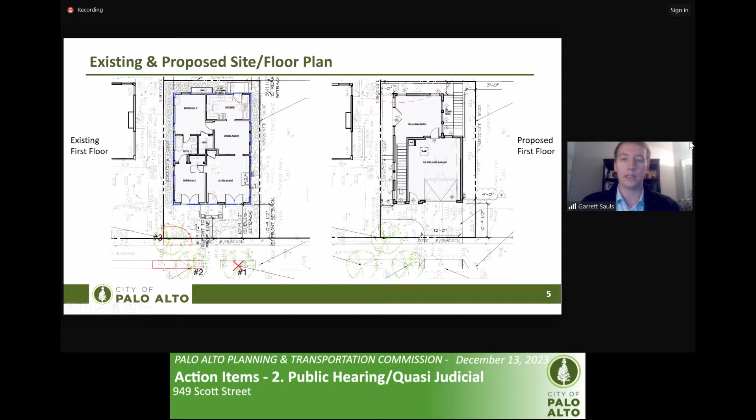Here you can see the proposed basement, where they have the family room and living room, as well as the bedroom and kitchen area for this proposal.

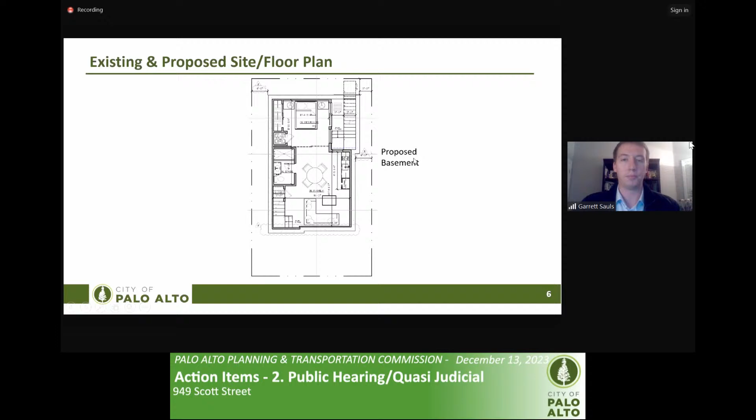On this screen, you can see the proposed elevations included in the plan set. This is the front elevation, with the doorway off of Scott Street and the driveway leading up to the 1-car garage. This is the side elevation from the left side of the property looking inward towards the site.

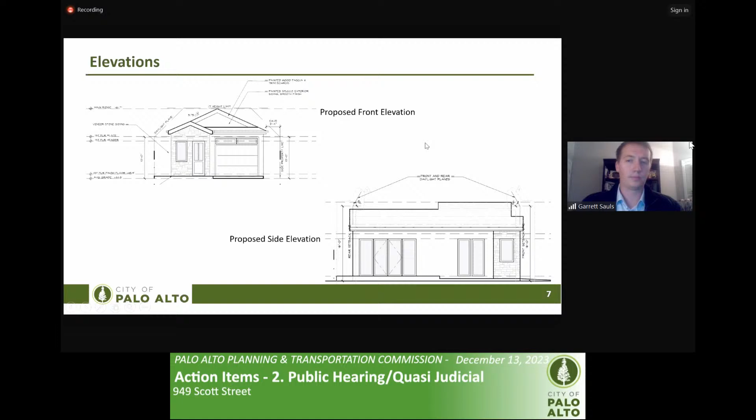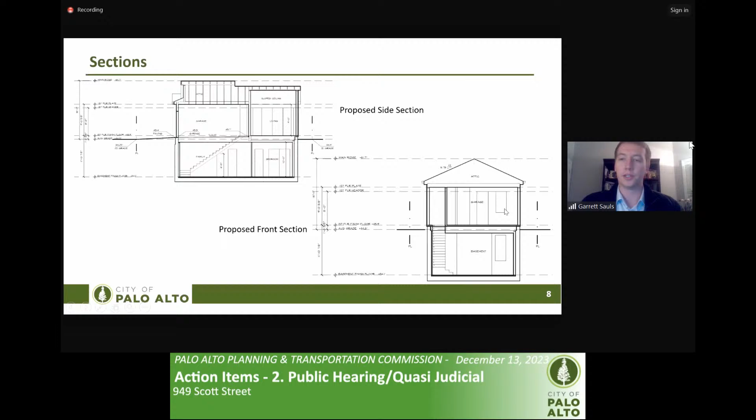Here are some section images showing cut-throughs through the building, showing the garage, living area space, and bedroom and family room space down below as a side section. And here you have a front section, which again shows those same areas.

We did receive a fair number of public comments on this application, relating to the number of variances requested, the aesthetic design of the proposed building, whether the structure will be used as a home or as an extension of the neighbor's house (who currently own this property), impacts to the existing street trees, concerns about parking within the area, the quality of life during construction, and lastly, consistency with the general plan as well as Senate Bill 330.

This last item loops back to item number 3, which asks the question of whether the existing structure is being replaced with something that still provides the capacity for a new single-family home for someone to live there.

Staff's recommendation would be to approve the proposed project based on the included findings and conditions of approval. That concludes my presentation. The applicant is also here and has a presentation that they will be able to share.

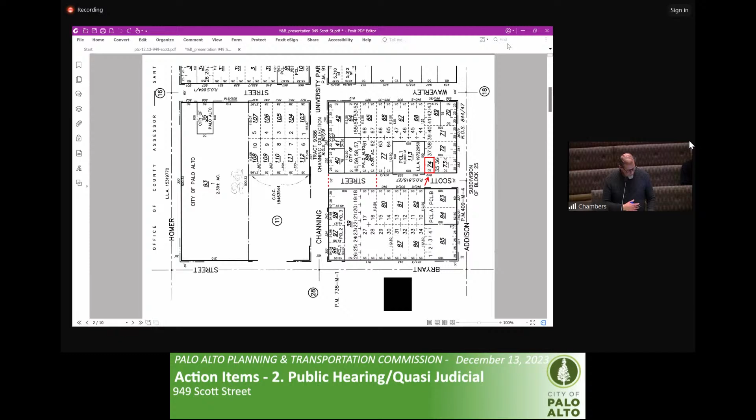So starting with the neighborhood, as we discussed, it's a little lot in the R2 area.

What a time to crash. I apologize, no, I just have to reopen. I'm pretty sure.

Looks like you're having a technical problem. I am, I'm sorry about that. If it's helpful, I can also share the applicant's presentation. That would work. Thank you, I think I can describe everything adequately.

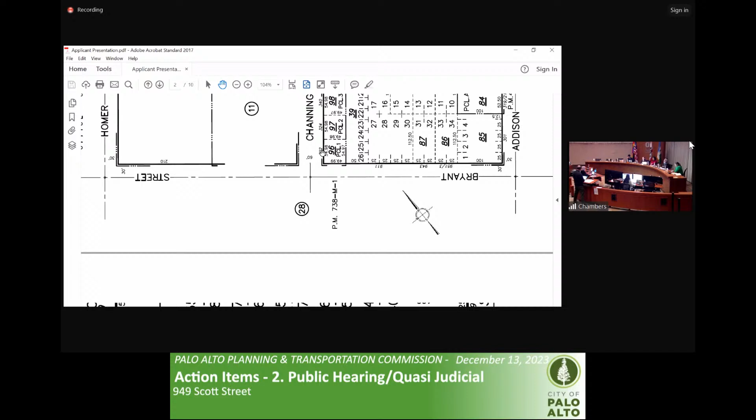That was just our chance to zoom in and understand the lot and the property. Skipping ahead to there we go. It's unique in its size and location.

If we go to the next one, we've seen this graphic before. So just to emphasize, it's only 180 square feet. That would be legally conforming, I should say. That's about a 0.12 floor area ratio if we were to stick just to that. That'd be similar to a comparable 6,000 square foot lot, 50 by 120, that you might see elsewhere all over Palo Alto. A 6,000 square foot lot with the 0.12 floor area ratio gives about a 720 square foot house, which leaves about 500 square feet for living area.

Certainly not what would be considered usable in a current context.

Next one. So just looking at the existing property, that's the existing house and floor plan. You can see we've checked the distances. The setbacks are currently 3 feet on the sides, as close as 2'10" on the right-hand side, and about 4 feet at the front and the rear. We're 17'10" to the residence on the right-hand side at 353 Addison, and almost 12 feet to the residence next door at 935 Scott Street.

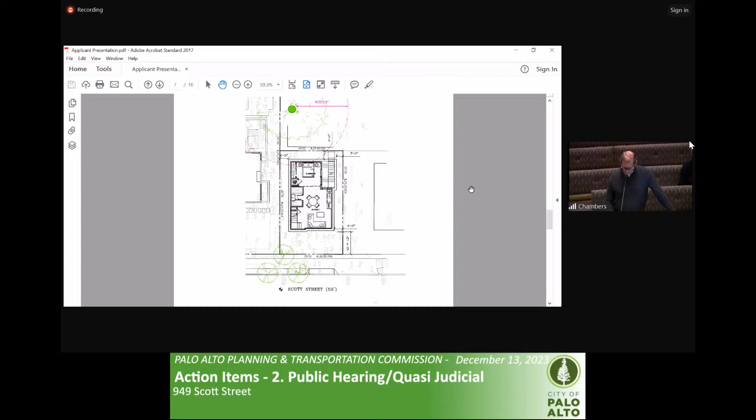There were concerns about the house being historic or old. It may be charming, but there was a historic investigation report by Page and Turnbull, and they found it to be ineligible for a historic registry. To clarify, Page and Turnbull is the city resource the city hires for these reports—this isn't a report we engaged privately to go in our favor. This is the city's firm.

Looking at our other slides, the previous slide was the existing front elevation—you can see the one street tree we'll be removing. The next slide is the proposed; we've ghosted the trees so we get a chance to see the architecture beyond for this presentation. You can see the driveway will be minimized into the right-hand side, closer to the other driveway. The last slide is our streetscape elevation showing the context of this structure compared to the neighbors. This won't be a view we'd ever actually see because of all the landscaping and trees, but it gives context of size and scale.

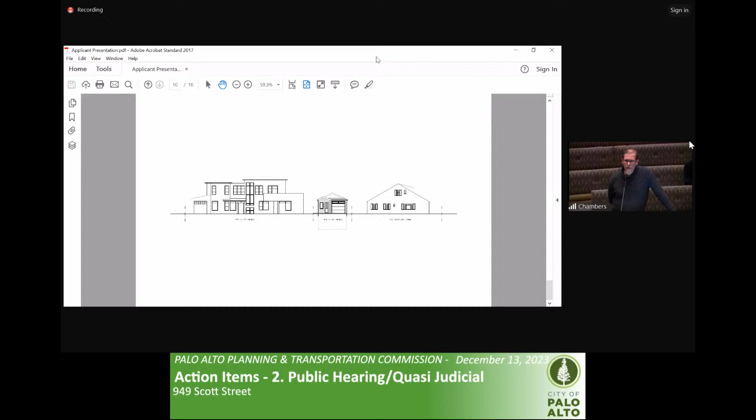I think that's the main points I wanted to drill on. We're ready for any questions or additional things we can provide.

Thank you. Thank you, Mr. Rhodes. I was wondering if my colleagues have any clarifying questions before we go to the public. Commissioner Hechtman?

Just a quick question for staff: the staff report didn't mention ARB. I take it this project didn't require any review by ARB? That's correct—this application, if submitted and approved, would simply go through a building permit process, given that it's a one-story home. Thank you.

Commissioner Chang: Quick clarifying question about the tree in the rear that is not on this property. If I look at A1.1, that drawing, there's a circle that shows a 300-foot radius. So what is required by the tree ordinance in terms of basements and trees?

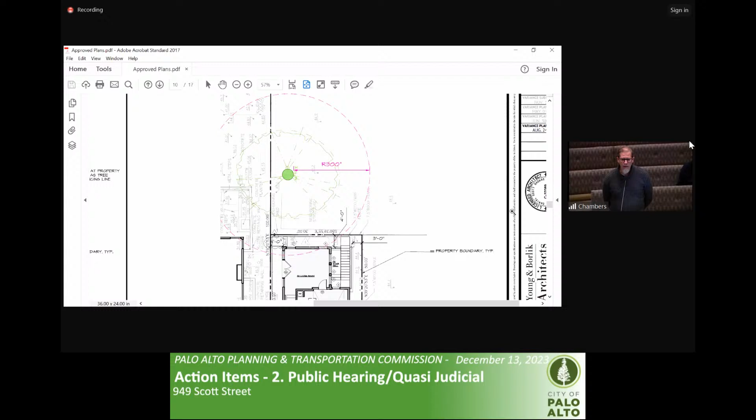Based on the diameter, it's 10 times the diameter for the tree protection radius. In this case, the arborist looked at that in terms of impact from the excavation. We would be using the back property line fence as essentially our tree protection fence in terms of any impact on the roots. The rear fence of the property line would essentially be our tree protection fence. Usually there's a tree protection fence that outlines that area to various degrees based on recommendations.

But I guess my question is, why is there a 300-foot radius and that circle goes into the basement?

Yeah, so the city has established standards for where tree protection measures should be put in place. Ideally what is intended is to try to provide as much buffer around where there might possibly be any potential roots. At this great a distance, there would not be structural roots to this great extent all the way out, extending towards the basement, where if they were to be modified, cut, or removed, they would somehow affect the tree to an extent that it would fail.

Okay, so the city arborist has made that evaluation then, correct? They do look at that as a part of the application submittal. This is, to some degree, a technical requirement, as Mr. Rose was talking about, where they look at the diameter of the trunk, and they've established a formula that says 10 times that diameter, you need to provide a tree protection fence around it.

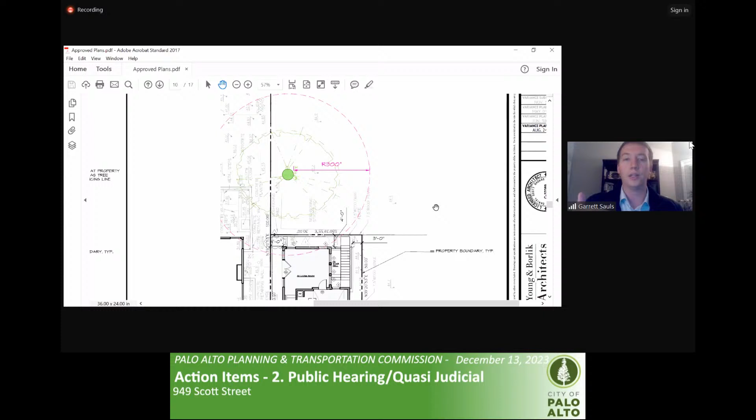If you see my cursor on the screen, if this tree were placed right here, such that the base of the roots, the more structural roots to the tree itself, were much closer, then there may be a scenario where any below grade construction would otherwise possibly cut into those structural roots. But at this greater extent back out here, these are almost like fingerlings or tendrils at that extent, as far away as it is from the main base of the tree, so you're not going to have structural roots that, if cut, would cause this tree to fail, collapse, or die.

Okay, thanks. And then I guess in the ordinance, is there some percentage of roots that can be removed? I think it's 25%, right? Is that the rule of thumb arborists have used in the past? I believe the new tree technical manual has tried to reduce that slightly, but 25% has been the general rule of thumb I've heard from urban forestry and arborists in conversations. This project wouldn't have anywhere near that kind of impact on this root zone.

The T sheets in our set also have the arborist report that we enlisted for the review, and they touch upon the impacts on the tree as well.

Okay. My other question is around SB 330. SB 330 only requires preservation of number of units, right? Reduction in number of bedrooms is not a concern, is that correct? I just want to verify.

In terms of the number of bedrooms, I will defer to Mr. Yang, but in general my understanding is that the number of units is the threshold that changes. So whether it's designed as a pyramid house or as a more standard type of single family development, so long as there are residential units being provided, in this case a 1-to-1 ratio, then there is not necessarily a loss of housing. Yeah, I don't have anything to add to that.

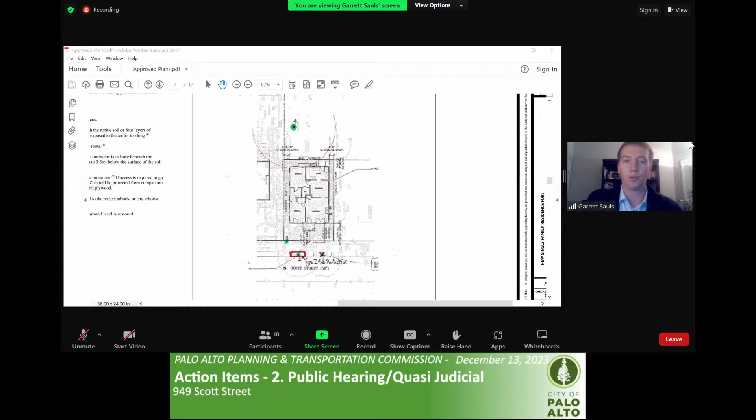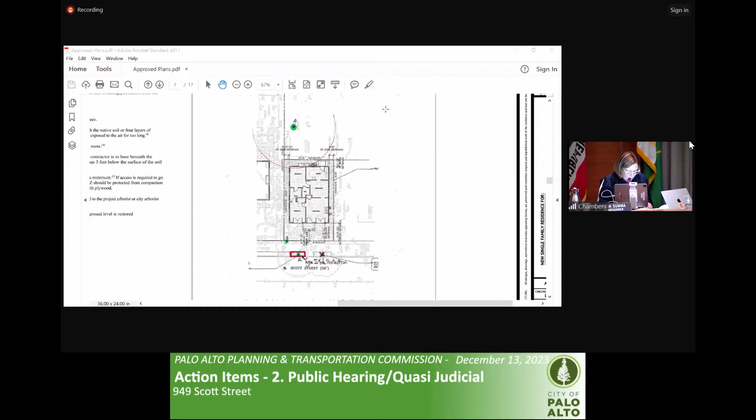Okay, I'm not sure that we got that in our plan set, but regardless, it's good to know it's not a protected species, but it is protected by size, I believe. But we now know quite clearly that the urban forestry signed off on it, that it would be okay. So that's good to know.

I am not seeing any lights still. So I guess, Commissioner Chang, go ahead. Oh, Commissioner Hechtman, sorry. Chair, I didn't want to cut you off if you want to continue with your remarks and then when you're done. No, please go ahead. Okay.

So I want to thank staff and the applicant for their presentations, and I'd like to thank the neighbor for elaborating on the correspondence he had submitted, which we did review. I'm supportive of moving forward the staff recommendation.

One of the things I like about this design is that it takes a non-conforming structure and in at least 4 ways makes it more conforming. I think in one of those ways makes it conforming, period, rather than just less non-conforming. So I appreciate the attention to that and the success in that design.

I also appreciate the modification of the house as this process went forward, starting with the 2-car garage, which we never saw that plan, but I would imagine, given its narrowness, would just present itself. That's all there's room for is a 2-car garage. That's what you'd see.

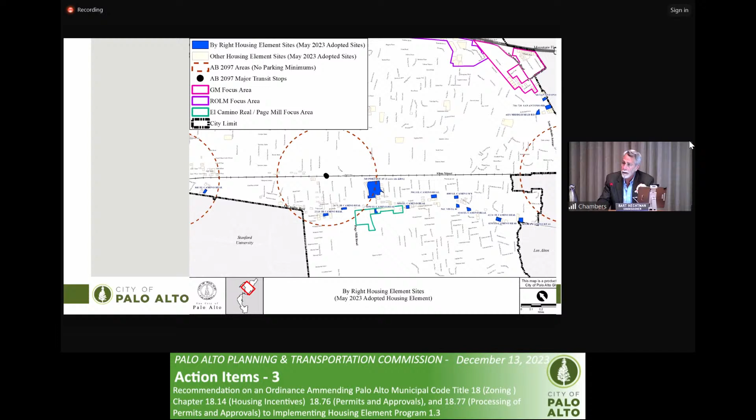Next question about these 16. I'm curious about the potential range of residential units for these 16. Did staff, I didn't see it in the staff report, look at, if all 16 were developed in the next cycle, based on their minimum range, we'd get at least this many units, and no more than that maximum number? Did staff happen to look at that and have numbers? We do have those numbers, available in our spreadsheet, but we would need a moment to tally that up for you. Okay, so maybe as the discussion progresses.

Okay, so those are kind of the clarifying questions. I've got a couple of suggestions for the ordinance, but I'll hold those until other commissioners have a chance to weigh in. You can, seeing no lights, I don't see why you can't go ahead. Okay, great. Then this is perhaps mostly a dialogue for Mr. Yang, but packet page 55, the bottom third of the page.

Section 18.14.050. My reading of subpart A, I think all of requirements 1 through 4 need to be met. Right, subject to the following requirements. These aren't either/or, but rather all of them. Do I have that right? Yes. Okay, so you might want to consider in the preface of subpart A, 'subject to each of the following requirements.' And then after number 3, instead of a period, add a semicolon with the word 'and' to lead into 4, to make clear in the ordinance that you have to satisfy all 4 of these.

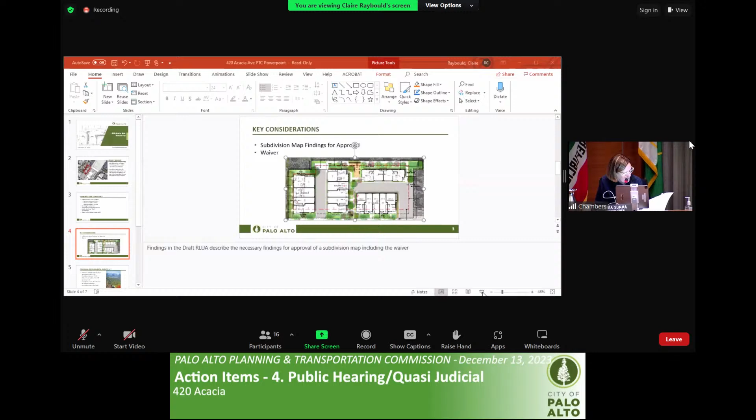I think we will dive right into item number 4, a quasi-judicial hearing for 420 Acacia, recommendation on the applicant's request for approval of a vesting tentative map to allow for a condominium subdivision, et cetera. I think we should go first to staff for the staff report on this item.

Yes, thank you. We have Claire Raybold remotely presenting this evening. Take it away, Claire. Good evening, commissioners.

Hold on a second, I forgot to ask for disclosure. So very quickly, does anybody have anything to disclose? No. No. No. No.

I probably should have consulted with Mr. Yang beforehand, but I live about 1,000 feet away from the property line. I believe I should be able to proceed, probably under the same logic that I was able to proceed on the Fry site, but I'll disclose that I live adjacent to the property. Staff looked at that issue and did not find any reason for a conflict. No disclosure for me. Okay, Ms. Raybould, thank you.

Good evening, planning commissioners. The project before you today is a vesting tentative map for 420 Acacia Avenue. The project includes a vesting tentative map for a single lot subdivision of an existing 35,573 square foot parcel for a 16-unit condominium subdivision. So it's one lot, but you're creating 16 air units essentially on that parcel.

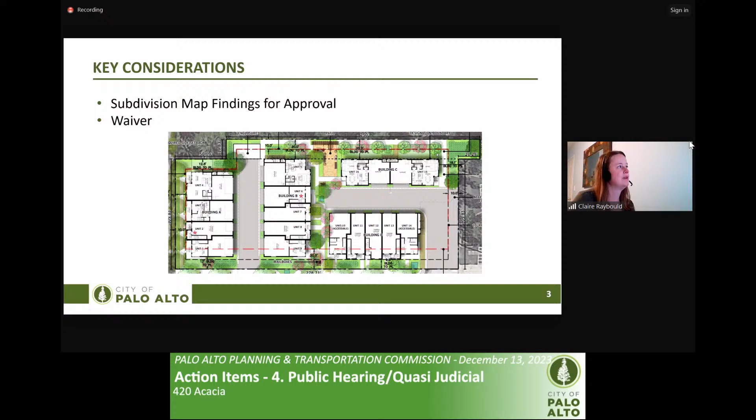I also want to note that the project was found to be exempt from CEQA in accordance with CEQA guidelines section 15332, a class 32 exemption for infill development, and that exemption covers the whole of the action, including both the proposed development and the map.

So with that, staff recommends that the Planning and Transportation Commission recommend approval of the proposed vesting tentative map to the City Council, based on the findings and subject to conditions of approval as outlined in attachment B of your packet. And with that, I'll turn it back to you.

The applicant is here tonight, Dividend Homes, as well as the architect, and they're happy to answer any questions for you. I'm not sure if they have a presentation, but they may like to speak. Okay, thank you, Ms. Raybould. Would the applicant like to take this opportunity to speak? You would have 3 minutes.